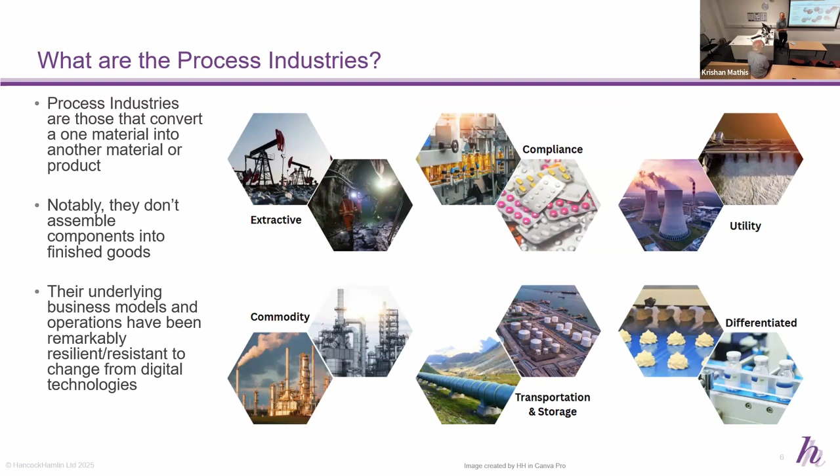But you've had some of the shed loads of money that didn't lead anywhere, is that right? Huh? You've had some of the shed loads of money that they spent. Yeah, it's fair to say that my pension is probably largely funded on some of the shed loads of money that has been spent on getting nowhere. Okay, right? Very good. Right. I'm not sure that that's fair or not.

I just wanted to say that this is a model that I've created over the decades I've spent working in and around this set of industries that says actually we can characterize all process industries at one level, but it's pretty abstract and pretty esoteric. But when we break it down and understand what each of them in turn does and what their underlying business models are, we can take that generic model and customize it and tailor it into something that's of practical and pragmatic use to an electricity generator, or somebody that runs long distance pipelines, or somebody that's manufacturing ethylene and polyethylene, right?

So what I envisage, and this is almost coming to the end, right, is this process industry neurology model or framework that is pretty abstract at its generic level, that applies across all the industries, but then can be tailored to meet the specific needs or requirements or operational modes of these individual subsectors. Right? So that's kind of my concept.

And you can argue the VSM itself is a further abstraction, right? So we have VSM as one abstraction. VSM is applied to process industries, which all operate more or less the same way. There's the next abstract. It's not an abstract, it's the opposite of an abstraction. What's the opposite of an abstraction? A realization. Still not terribly useful in its own right, but then we get to a further level of realization of saying this is what you need to do for compliance-based industries like food or pharmaceuticals. Yeah.

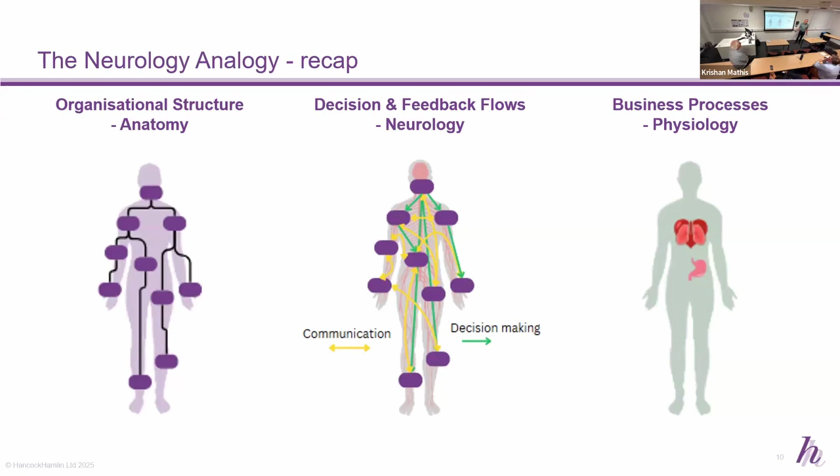So, the point of today really is this kind of loop. I'd like to engage interactively with you. In the process, I'll talk about my perception of where things are at, and see what we get.

Okay, my interests mostly fit in the infrastructure sector, electricity. At the moment, it's staggering its way through becoming a smart grid. They know they've got the potential for sensors and processing of data at all sorts of levels, but they're not quite sure how to do it. Absolutely. So does infrastructure data map onto process industry data? I would say it does. If I go back to my model, I would have that all in this. It's arguably sort of in between these two. This is more about generation, this is more about distribution. But water might fit in there. Absolutely, and electricity and other things.

Because increasingly, the electricity infrastructure is having to deal with concepts like storage, the batteries. They really don't know how to do that. And also lots more embedded generation, lots more demand side management because of various market forces. So there's a whole lot going on. It's a bit of a wild west. Well, absolutely.

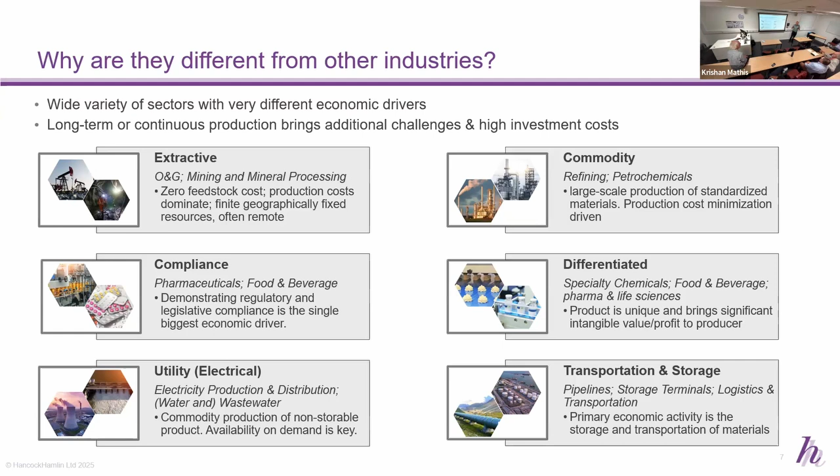Well, that was a question. I mean, have you taken a process industry you know well and tried to map it using the VSM? Have you ever done that? Because that's part of the purpose of the presentation. So, okay, I'll run through a couple. This sort of speaks to the why, right? A slightly different version of the same challenge, I think, or manifestation.

I can contrast. My model here is an aerospace engineer who works at JPL in California, which is where they drive the Mars lander from. So every day that individual gets into work and looks to see where the damn thing is. Where did it get to? And then they say, where do we want to get it to today? They spend most of the day planning how it's going to travel from point A to point B. They map it all out, they simulate it, they do all sorts of things. And the objective by the end of the day is to get a robust set of instructions, beam it up to Mars and press go when they go home.

And it trundles along overnight, and then they get into work the next morning to see where it got to. This is periodic, discrete, slow, deliberate movement. By contrast, the process that same engineer goes through when they get in their car to get to work or go home is fundamentally different. They know where they're going, they go until they get an alert saying traffic ahead, or look at that kid running across the road, at which point they intervene. They operate in responsive, immediate runtime. I call it runtime rather than real time because the IT folks get upset with real time as a statement. But it's a fundamentally more effective way of operating.

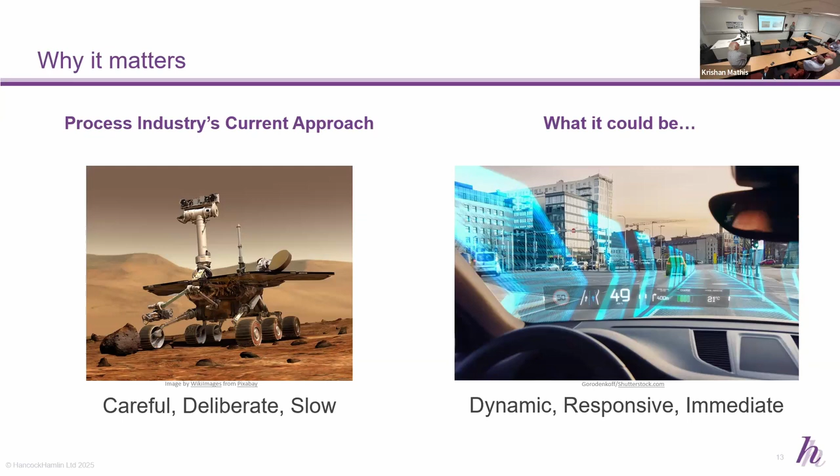I'm already engaged. So neither of you would I trust within an inch of my life to actually use this responsibly, but then I also have to work with individuals and companies in these industries who I know are desperate to try and make a difference and understand how. Right? And I'll put it to you that an example of how this makes a difference is when we think about emissions, right? This is just an example, right?

This is something that I originally developed when I was asked to work with a very big oil company on their circularity strategy, which I found intriguing. So how do you circularize oil? It's a challenge, right? Well, you can, it takes millennia, right? But anyway, one of the big issues we see in downstream manufacturing is real focus on embodied carbon materials going into packaging or raw materials, real interest and a willingness to pay a premium.

But when we go upstream to the bulk commodity producers, they don't have the numbers. They can't tell you what's the embodied carbon of this load of plastic or this chunk of metal or this lot of glass, right? They don't know. Well, they claim they don't know. They don't know in part because you don't make this stuff as batches of plastic. We just make plastic and it keeps coming.

Yeah. Just a point of information. So they know it for the carbon border adjustment mechanism, right? They know it for what they think are heavy emitters, so all kinds of steel, all kinds of cement. I think there are six categories. They know it at this level. They have generic standards used to differentiate between those things. But what they don't know is from that plant yesterday, what actually was it?

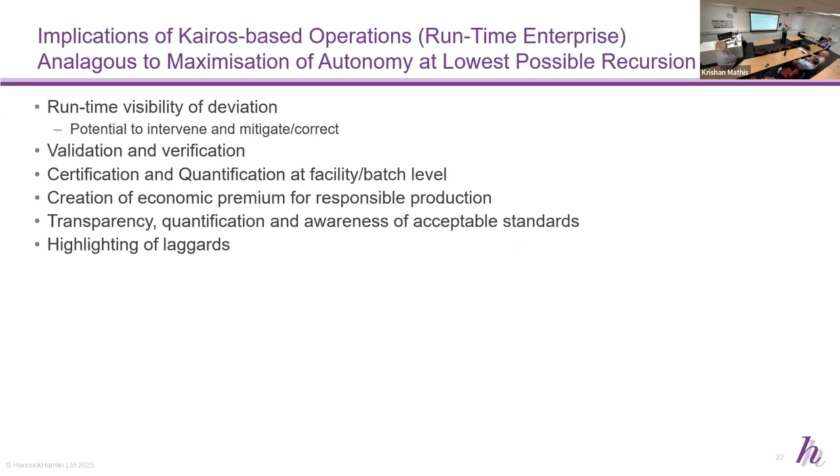The other big example is around market responsiveness to flexibility. One of the things that I was involved with was building a new plastics business, and we decided we were going to compete on the basis of being the most dynamic and flexible in Europe, meaning that when somebody desperately needs something, they would phone us first. And that's what you want. You want the first phone call, right?

You don't want to be third in the list or fifth in the list, because by that point you've lost your opportunity to charge the premium for the desperately needed product. So we wanted to be first, but to be first, we needed to be able to give an answer now, not in an hour or a day, or we'll get back to you tomorrow or next week.

So we created, and if we're interested, I've got the whole process of how that would work in the deck. Right? No, it's useful though to kind of look at where this all come from. So this is a story.

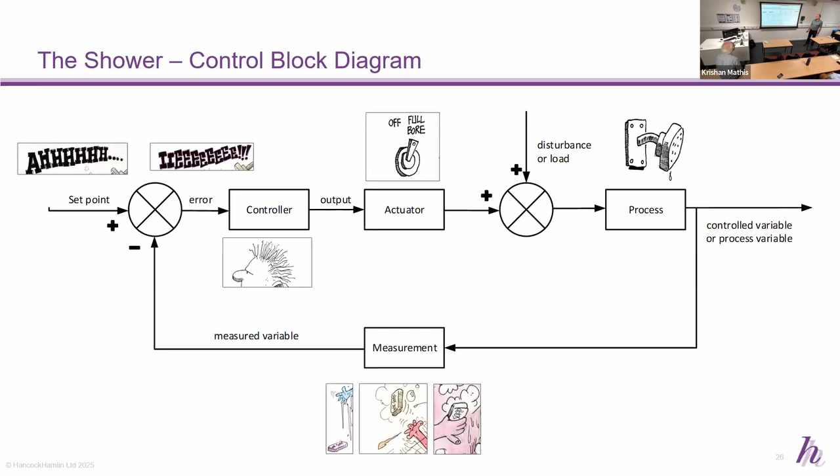Ta-da! You saw this this morning, right? We have this sort of a control. You guys have all seen this, and there's your E's and your R's. So this is really just introducing the way we tend to draw it. But again, you guys have seen this, right? So we end up with something like this: a control loop where we've got a three-way valve into some sort of mixer.

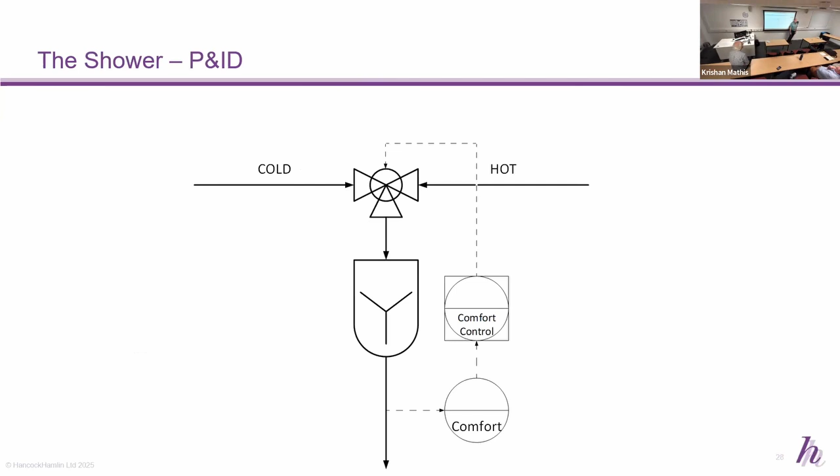So I have my 8 golden rules of process control, and I'm going to highlight 3 of them. This one: you can't control something you can't measure, right? And you've got to measure what matters, not what's easy. It's a classic mistake, right? And any measurement you make is always wrong. That's another fundamental rule. There is no such thing as accuracy in this sense. So what do we do about that?

So can you explain the last one? Last one. Well, it's the challenge here. One of the things we often see, particularly if you're trying to do something like inventory control. So you're doing battery storage, or the big one is we're trying to put gasoline in and out of a tank. Very often students say, well, just have 2 flow controllers, and you know what the flow in is, and make the flow out match it.

And in theory you could do that, so you have 5 tons an hour going in and 5 tons an hour going out, and in theory that should balance the tank. People intuitively say that's what you should do. The problem is there's no measurement you make that will ever actually be right. The one thing with all measurement is it's wrong. The more money you pay for the measurement, the less wrong it will be. But it will always be wrong by its very nature.

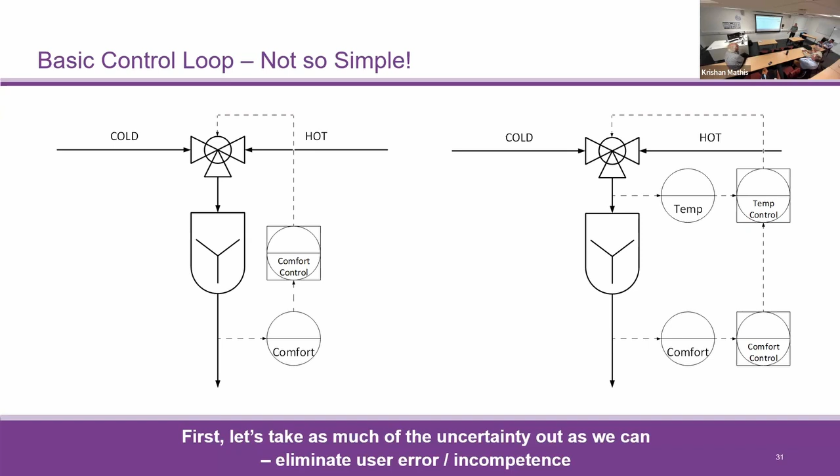Maybe, I don't know. But we don't like these kind of weird, goofy things, so we want two valves, and we get increasing degrees of sophistication. And actually what we've done here is by introducing a second measurement, we can control the second variable, so we can have both flow rate and temperature, but only if we measure two things. Two measurements means we can control two. One measurement, we can control one.

Why did you say it's recursion? I get feedback, but why is it recursion? I couldn't see. Well, maybe it isn't at this level. I think temperature to flow perhaps is. I don't know. Okay.

But where we're going to go next is when we say this is no longer a shower. This is an oil refinery. It's one of a fleet of oil refineries that comprise an entire global company's manufacturing operations. You can sort of imagine layering and layering and layering on top.

And actually that has always been our goal as we try to automate: how far can we go on the automation stack? Because what we don't want is lots of people having to enter lots of setpoints. Right? So what we want is something determining what that temperature should be, which is based on some sort of quality, which is then based on some sort of target production rate, which is based on some sort of inventory and market demand, which is based on, and you can go all the way up to the top level of the organisation, so you can understand the cascade of

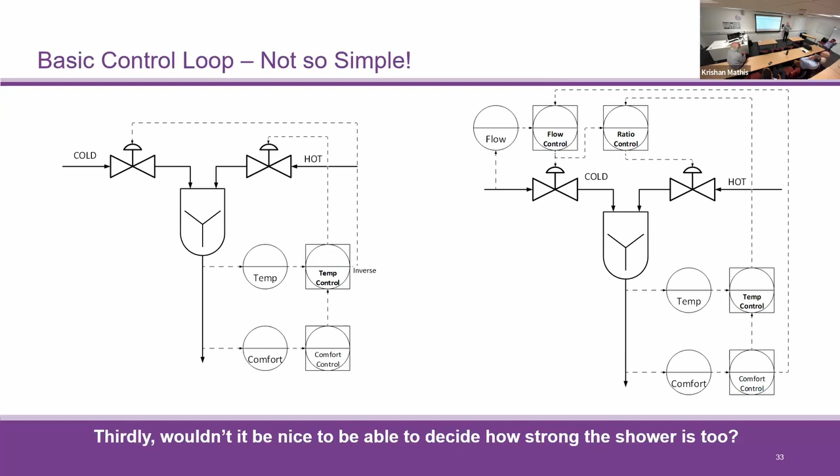decisions. And what we've always kind of conceptualized is, well, if you can understand the cascade of decisions, you should be able to close a loop on those decisions and automate it. Yet there's always been a fundamental barrier or problem in doing it that I don't think any of us have ever really understood. Right? So I'll just sort of bounce through. The other thing that kind of runs into this is the path dependency. The history is really fundamental to this, right?

We started off, this is the original control system. It was called a one-legged stool. And this was in Dumfries, on an ammonium nitrate, I think it might have been nitroglycerin, but an explosive plant. And his job was to turn the wheel to keep the dial where it should be. And the purpose of the one-legged stool was because it was the most boring job in the world. When he went to sleep, he fell off the stool and woke up again. No, seriously, look, it is a genuine thing. It's like the guy in Metropolis.

And actually, Metropolis is really good because this is an actual photograph from the first plant that I worked on. It was older than me when I started working on it. But I still did the first digitalization project for ICI. Some of you remember ICI, right? I did the first digitalization project on the shop floor for retrofit for ICI anywhere in the world, and it was actually this plant. So it tells you about how recently that happened.

This plant, these things are actually pneumatics. So there wasn't an electronic signal in here. We blew air down a straw for about half a mile and inferred the flow rate. So going back to this, no measurement is accurate, right? We inferred what the flow rate was by where between 3 and 15 psi the pressure of the air at the other end of the straw was.

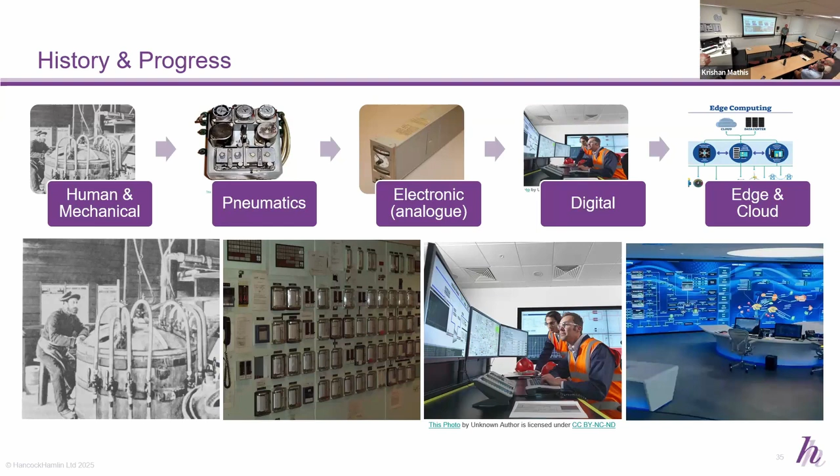We're way out of time here, guys. Let me kind of back this through. I'll get to the end of this section and we'll stop, right?

Because what we then did, we created this thing called a DCS, which is one of the most misnamed pieces of equipment in the world. It stands for Distributed Control System, and it's categorically not distributed. I used to work for this company. I was a kind of global competency domain lead for sustainability and production optimization.

You'll see what we have down here: all of these are the things actually talking to the plant, the measurements, the valves. You then have this layer of stuff that's doing the thinking: receiving the signals, converting the signals. Then we have a display level. And we created this thing called the Purdue model. Level 0 is the plant itself, and essentially all of this stuff is in levels 0, 1, 2, 3.

Then there's a level 4 and actually a level 5 above it, which is where you get into what the business is doing: commercial operations, HR and all that sort of stuff at the top. And this model is still pretty much the predominant mindset in the industry. Interestingly, at the time it was created, hardware and software were synonymous, because you ran the software on the hardware and everything happened on the same box.

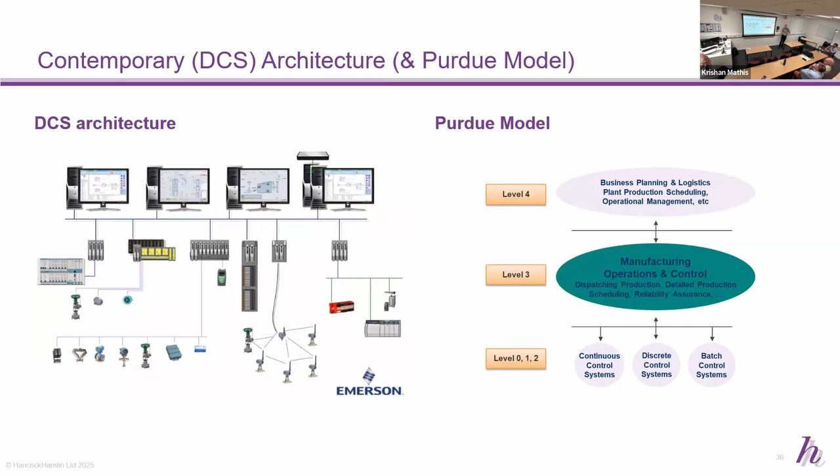So nobody ever really knew whether this is a hardware or a software model. Is this anatomy or physiology, if you like? Nobody ever had that clarity. Obviously, what's happened today is any of this can be anywhere. We bounce signals wherever we want. But we still stick to this world, right?

And then it got more complicated, because it wasn't only about operational processes. There's health stuff from reliability, safety stuff, environmental stuff, legislative stuff, physical information, all sorts of other information coming in, and suddenly that's becoming digitalized. Well, we automated closed loop the process probably during the 1950s, and made that electronic later. But since then, a whole lot of other stuff's become available with real-time measurement.

And what we're trying to do is squeeze all of that into the one architectural model that we've got. So we're now trying to do reliability and safety, all more or less in the same architectural model. Squeezing it all in.

Now we get to the point where we squirt all this stuff into the cloud with some forlorn hope that it might be useful to somebody one day, and then get frustrated that it's cost a shitload of money. We pay Accenture or Capgemini an absolute fortune to tell us what we should do with it, and then they leave and we can't remember what they said, and have to pay them even more to come in and maintain the systems.

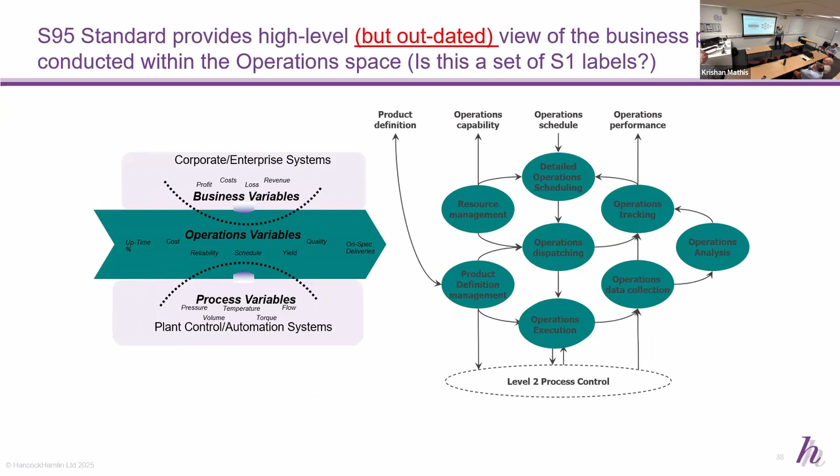We're in that loop, right? It goes into a data lake. Well, yeah, or data swamp. That's not a new one, right? So we then have this. Now I'm starting to say this is starting to look a little kind of System One mapping, right? But this is sort of recursive. I don't know whether it is or not.

But it gets more complicated as all of a sudden reliability starts impacting on operations, starts impacting on logistics, is impacting on shipping and marketing and commercials, right? We're in this integrated world, and people are just drowning. But we haven't changed any of the underlying ways of operating at all, because we don't know how to. Because we've got no model of decision making, we've got no model of neurology, is now my theory, right?

Well, okay, so this is at the plant level. We've got a slightly goofy kind of architectural setup where we have a DCS, right, or a SCADA system just doing the runtime, real-time interaction controls. What we typically now do is we have a time series database, which we call a historian, right, where we spit most of that information into.

But alongside that, the time series historians aren't great for storing relational type structures or discrete type event structures. So we have other databases as well. For example, often we'll have an energy management system inside the historian. We'll have labs, we call it LIMS, laboratory information management systems, right? Because they don't really fit in the same data architecture. So from a software perspective, they don't look the same.